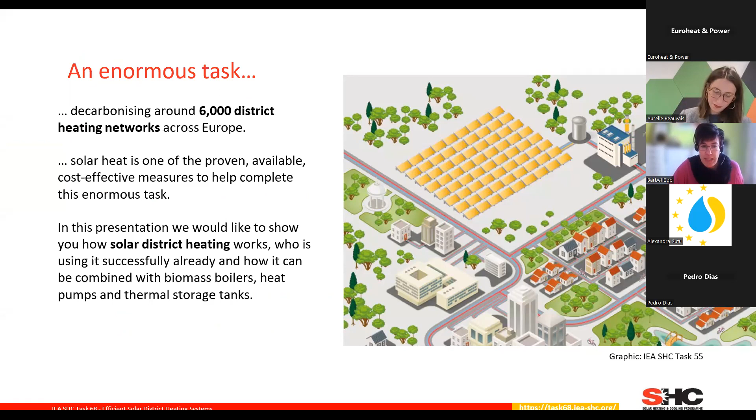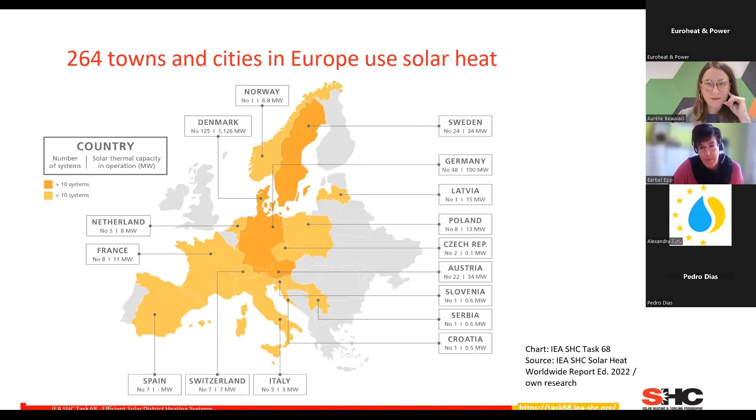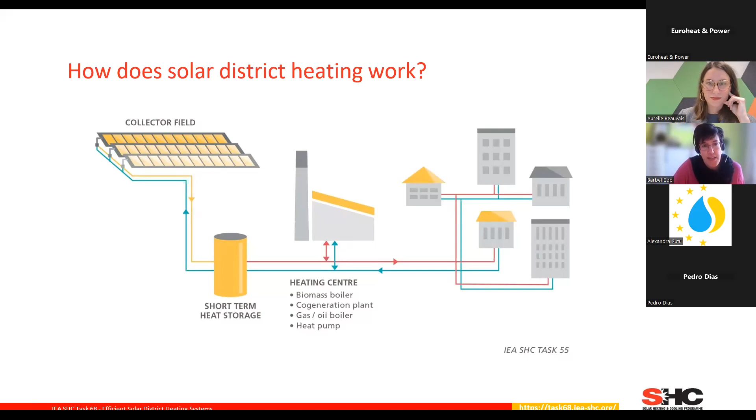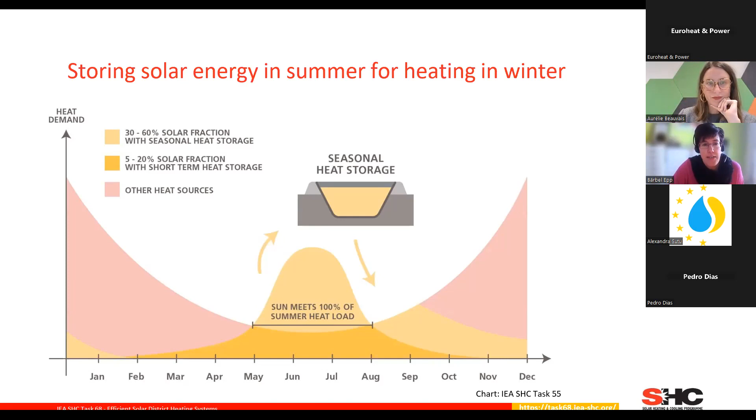If you dimension your collector field in a way that you have additional solar yield, you store this and use it in the autumn and winter season, as it is illustrated here in light yellow. And this brings up your solar fraction tremendously. And these kinds of systems work successfully in Denmark a lot.

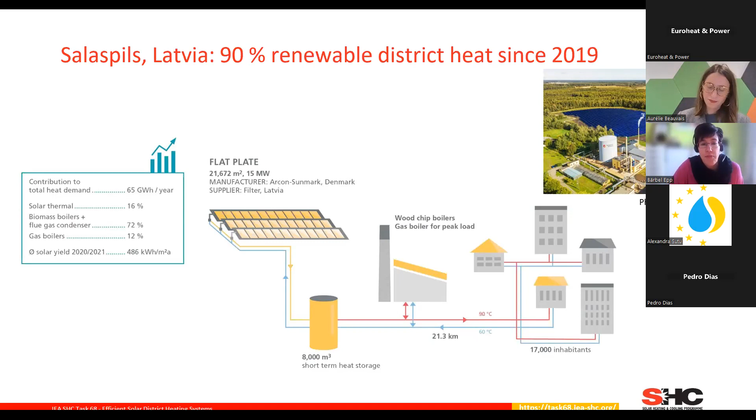Here, Latvia, Salaspils is a real front runner in terms of renewable district heating. They have 90% share since 2019, and I'm happy that Ina, the managing director of this utility, is today with us in the panel to tell us more about this success story. They cover 72% biomass within their total heat demand of 65 gigawatt hours, and 16% is contributed by solar thermal and only the rest by gas. They have a 15 megawatt system installed in the forest, as you can see on the photo.

Solar heat and biomass is actually a good match because you save a lot of wood in summer when your solar system takes over 100% of your heat needs in your district heating grid. And this also extends the service lifetime of your boilers because you have time to shut them down to do your maintenance in summer, and you will have less operating times. And obviously you have a 100% pollution-free heat source over summer, which is in touristic areas an important measure.

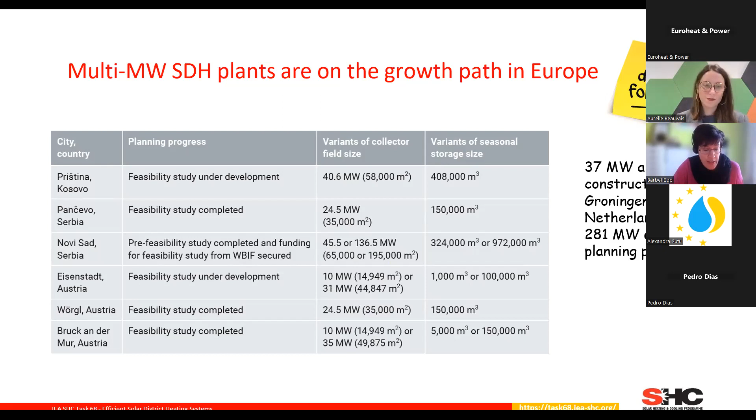Multi-megawatt solar district heating plants are on the growth path in Europe at the moment. We have a 37 megawatt system under construction in Groningen in the Netherlands. And this table alone shows you planned systems in the size of 281 megawatt. I want to refer to Bojan. He will be on the panel today as well, and he works for the European Bank for Reconstruction and Development and is responsible for the first feasibility studies, which are mentioned in this table in Kosovo and Serbia, and he did a great job in mobilizing the cities to go in the direction of solar heat.

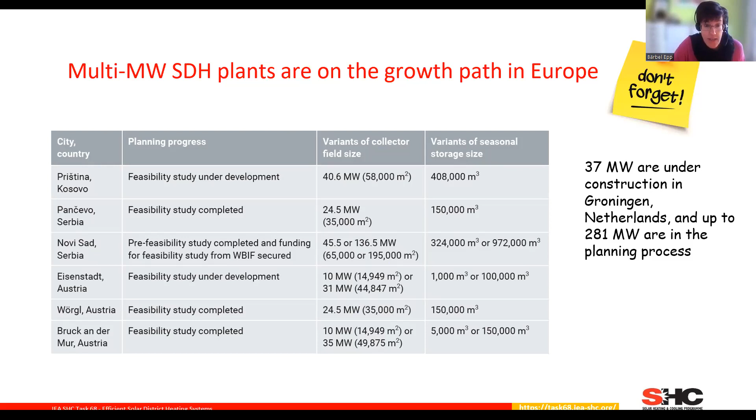The reason why there are so many large feasibility studies now in preparation or even completed is because the EBRD bank subsidized these feasibility studies and also the Climate and Energy Fund. This was an important vehicle to actually size up solar district heating, that feasibility studies were completely paid by these two players. The first of these projects, which is very likely to be realized because the funding of 80 million is already secured, is Big Solar Pristina, and it replaced coal-based electric heating.

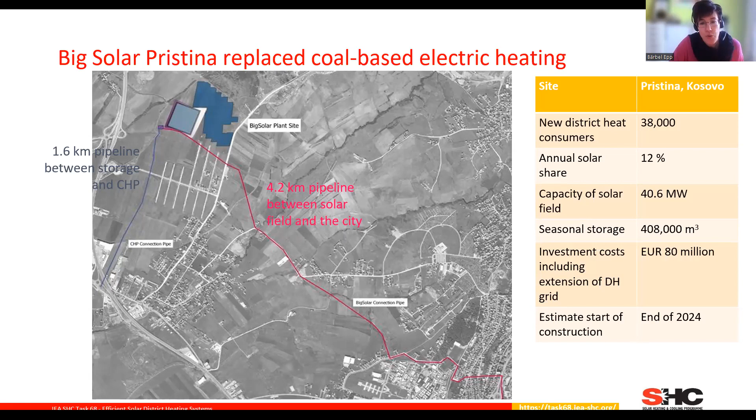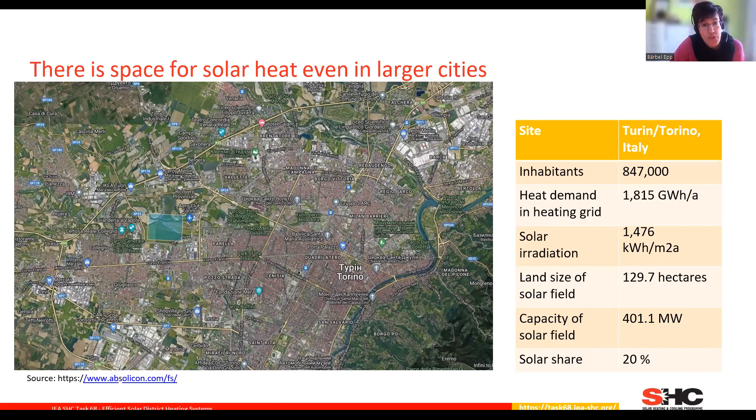Again, space. There is space for solar heat, even in larger cities. This is another example from Turin in Italy, an 850,000 inhabitant city. The calculation here was to see how big a field would be if 20% of the district heating heat demand would be covered with solar for this city. And you see the square here in green. It's a reasonable size, which really fits into the city, and you can find even other areas around the city center that could supply these 20%. So if there is political will, even in larger cities, there's always space for solar heat available.

But going back to Big Solar Pristina, I would like to stress an interesting design effect of this plant. And this is the combination with absorption heat pumps. You see here again what I've shown before, a collector field with the seasonal storage, which can store heat up to 95 degrees. But the district heating grid in the center of Pristina requires 125 degrees. So this gap is done by a high temperature absorption heat pump.

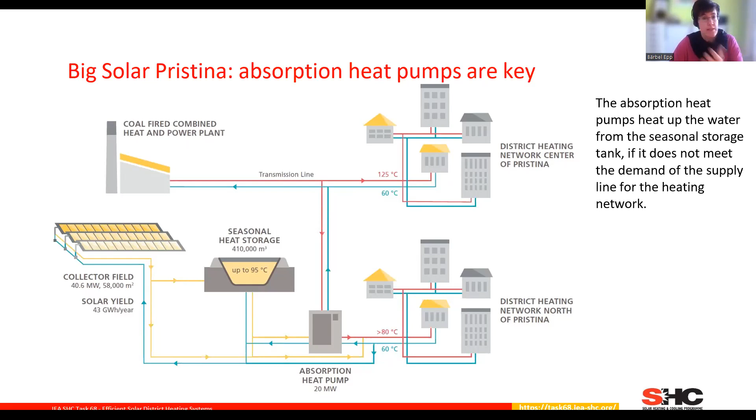And this combination was used a lot in Denmark, and it has really two nice effects. First, you can directly feed into a feed line of a district heating grid, even at higher temperatures. And secondly, this absorption heat pump helps you a lot to empty your storage to a very high extent over the winter season, like even if the storage is already cooled down to 30, 40 degrees, the heat pump can still lift it up and use it as a heat source.

But temperatures in district heating grids can be also reached by changing the collector type. This is, for example, an installation in Geneva which produces 85 degrees even in winter time on a guaranteed level, because it uses special high vacuum flat plate collectors. And the company is TVP Solar, and we have today the Vice President Business Development, Guglielmo, on the panel to tell us more about that.

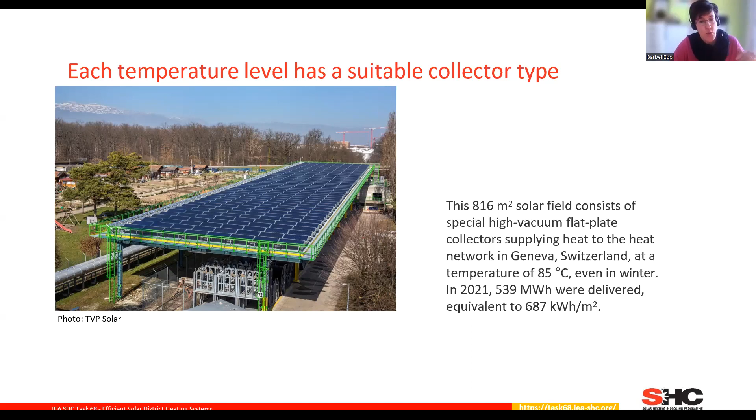So you can either reduce the flow rate in your field to get higher temperatures, or you use a different type of collectors if you have higher temperature needs in your grid. Costs, well, a very important issue. We have gathered 120 real cost data of district heating plants in Europe, mainly in the countries Germany, Austria, and Denmark, installed over the last 10 years. And we have put them into this slide to show a typical cost reduction curve over size.

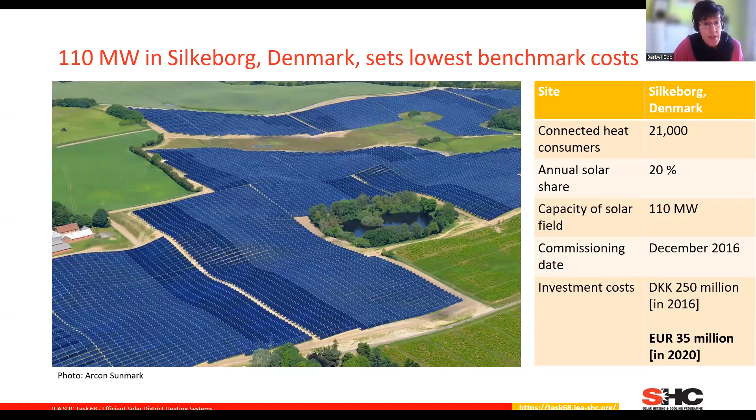So the x-axis is the size of the systems. And the trend curve you can put into this crowd of points indicates that a doubling of the size of the plant reduces the costs by 14%. The largest plant in Europe, which is shown here, Silkeborg, with 110 megawatt, from 2016, is part of this assessment. So you would find it very far on the right-hand side outside the chart. But the trend curve would indicate costs of 180 euro per square meter at this huge size of plants.

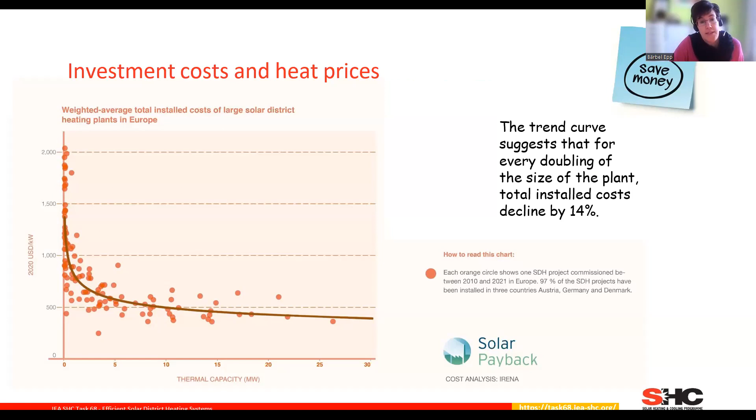So I would like to show you what this does now to levelized costs of heat. This chart here is calculated over 25 years with a discount rate of 3%. And on the left-hand side, you find Silkeborg again. With the real costs of the year 2016, you end up with 33 euro per megawatt hour at the typical irradiation of Denmark. But if you place this particular system in sunnier countries, and now we get to Serbia, where Bojan is based, and he's very successful with selling solar thermal systems there, or even France and Spain, you reduce the costs even by half again. And you see these 18 euro per megawatt hour is a tremendous saving against some of the gas costs we had last year.

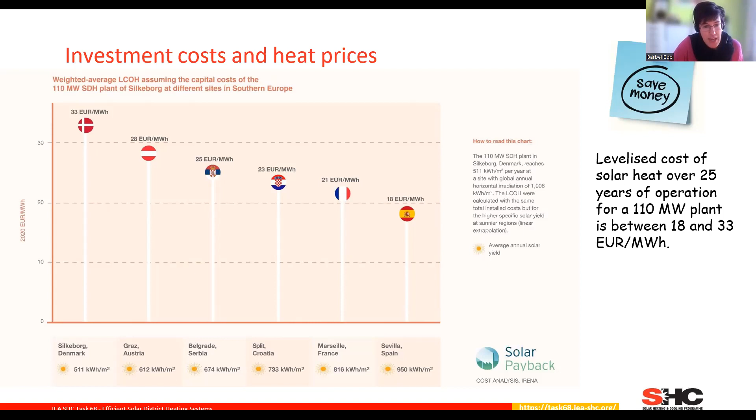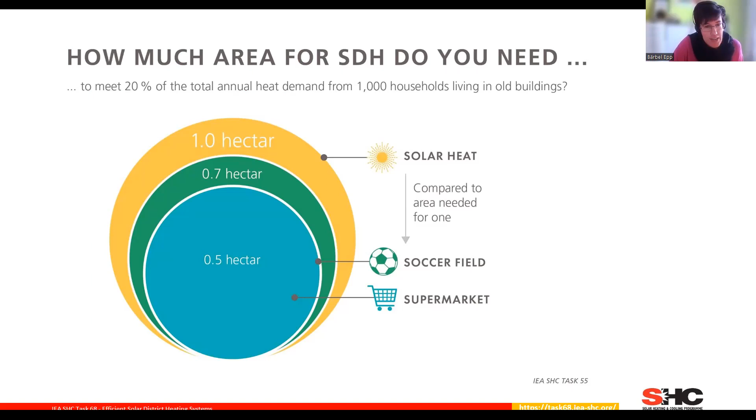Yeah, so again, an issue on area, because this is usually seen as the biggest barrier in terms of solar district heating. I wanted to give you this rule of thumb. If you want to meet 20% of the total annual heat demand from 1,000 households living in older buildings, you need a hectare of ground. And if you know that a soccer field is already 0.7 hectare, and that in a lot of neighborhoods and quarters in your city there are football places, you see that a hectare is not really a barrier. You can find available hectares in your city.

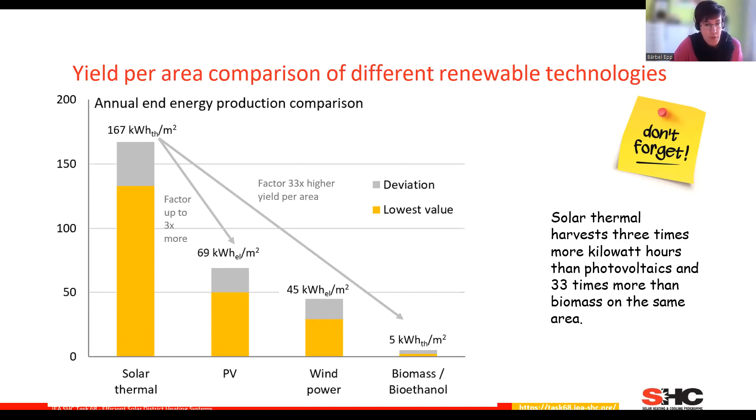And this is my last slide already. Just to sensibilize you that solar heat has a very nice harvesting rate per square meter. If you compare it, for example, with PV, as PV has a much lower efficiency on the square meter, you harvest a factor 3 more kilowatt hours. And even if you compare this to biomass, I mean grown biomass, not residual biomass from forest, obviously, grown biomass would even have a factor 33 lower than a solar thermal plant on the same area.